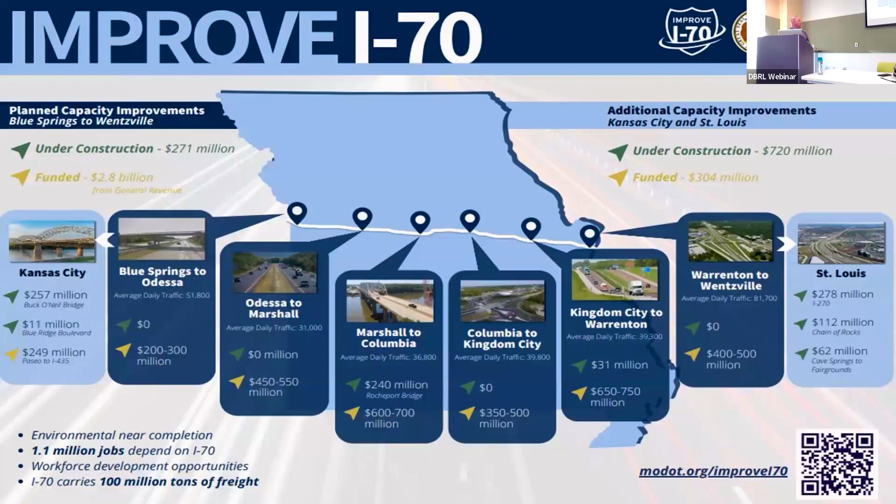The rest of it through Columbia will fall into the Marshall to Columbia project. But that's not going to be one project either - that's going to be split into a few different projects as well. This was our first shot at it, and that's kind of what we came up with. This is another way you can look at it. The first 3 projects are pretty much set. The first project, obviously, we're already working on that one.

The second project is Wentzville and Warrenton, and they have awarded that project, so they will start construction very soon. The third project is Blue Springs to Odessa, and they're well on their way into their procurement on that one.

I think now might be the right time for me to talk about this, since she mentioned design build a few times. Our normal process is called design bid build, where either MoDOT designs the project or we have a consulting firm design it, and then we put it out for bid, and whoever the low bidder is gets to go build it. It's worked for years and years. But on some of these larger corridor projects, and even some smaller ones, we use what's called a design build framework. It's a two-phase procurement.

The first thing we do is say, hey, we've got this project, we want to know who's interested. Contractors and consulting firms team up, and we put out an RFQ, a request for qualifications, and they submit SOQs, statements of qualifications. From those, and this is all dictated by state statute, we shortlist between 2 and 5 teams.

A team is usually 1 or 2 contractors and 1 or 2 design firms. We shortlist them, and then we work with them for a few months as they develop a proposal. So instead of us fully designing it and saying this is what you're going to build, they have a chance to use innovation and come up with better plans and different ways of doing things.

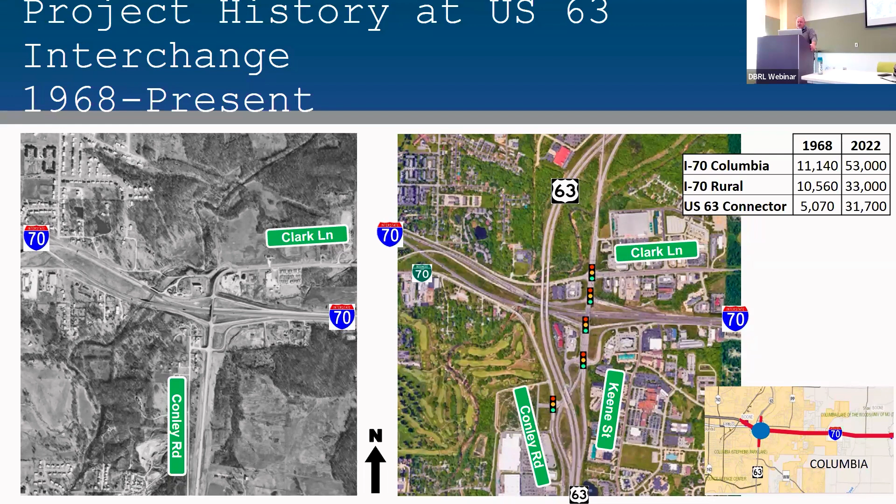So we're going to take another shot at fixing it, and I think we have a pretty good design. I told you when we go into the design build that we have things we have to have. We said you have to rebuild the interchange at 63. We also said a couple other things.

These two movements in the red lines that you see, the northbound to westbound and the eastbound to southbound—mainly the northbound one—those are the ones that really lock this interchange up and cause all the trouble. So we not only said you have to rebuild the 63 interchange, we said you have to give us direct connections for those two movements. By direct connect, it could be a flyover, it could be a loop ramp, but basically something where you don't have to go up to a ramp and stop. So that was a requirement, that they have to give us direct connects for those two movements.

There's some other movements that we would have liked direct connects for, but they get really expensive. The one everybody talks about is westbound to southbound. The problem is you end up buying a hotel, maybe part of Cracker Barrel's parking lot, and the bridge to do that has to be on what they call the third level, which is about 80 feet in the air. So it just gets really expensive, really quickly.

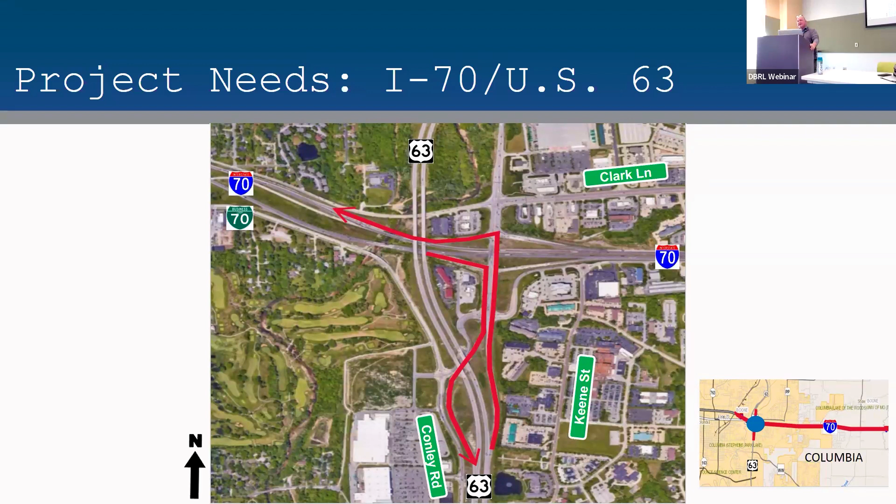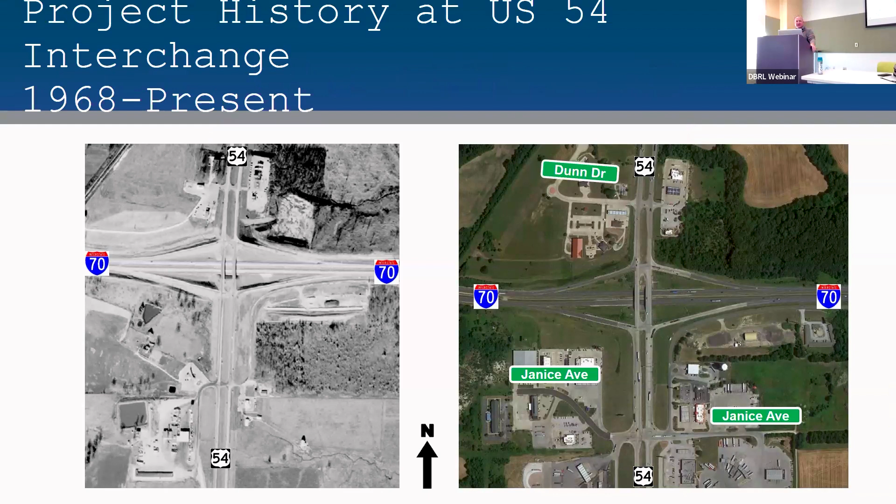This is the 54 interchange, and it's weird that the geometry of this interchange hasn't changed since 1968. It's still a diamond and looks exactly like it did, with the exception of all the businesses that have developed down there. These are the two movements that really cause it, and they're basically related to lake traffic—Friday afternoons trying to get to the lake, and Saturday, Sunday, Monday trying to come back.

We basically don't have enough money to build that kind of an interchange there. So we're going to do some stuff to help those traffic movements, but they won't be direct connects though.

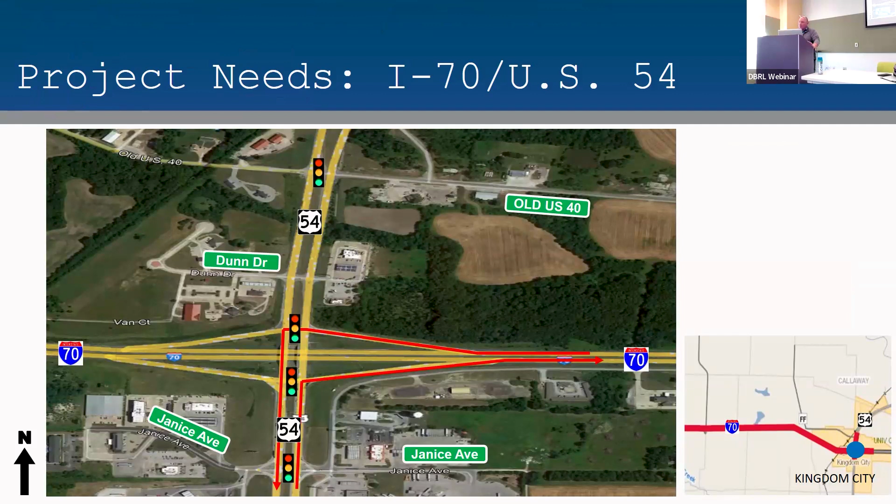So I told you a little bit earlier about the design build process, and this is the team that we chose—Millstone Weber—as the best value proposal. These are some of the reasons why they were chosen. Obviously, they give us the third lane in each direction. The biggest part of their proposal is they are reconstructing the pavement from one end to the other.

The existing lanes will be rubblized in place, and then we're paving 11.5 inches of concrete on top of that. The other proposal had some places where we were just going to do an overlay of the existing lanes, so you'd have a new lane, but then you'd still have the old lanes right there with a 2 or 4 inch overlay on it. So that's probably the biggest difference in the proposals.

We also include 16 new structures. When I get into this, you'll see where all these roundabouts go, but it has roundabouts. The 54 interchange is definitely a unique design as well.

They did commit to having 2 lanes on I-70 open during construction. That's during the day, we do have to close lanes at night. There's pretty much just no way around it. But they did commit to not closing lanes on I-70 during the day. They also had a commitment to growing a diverse workforce as well.

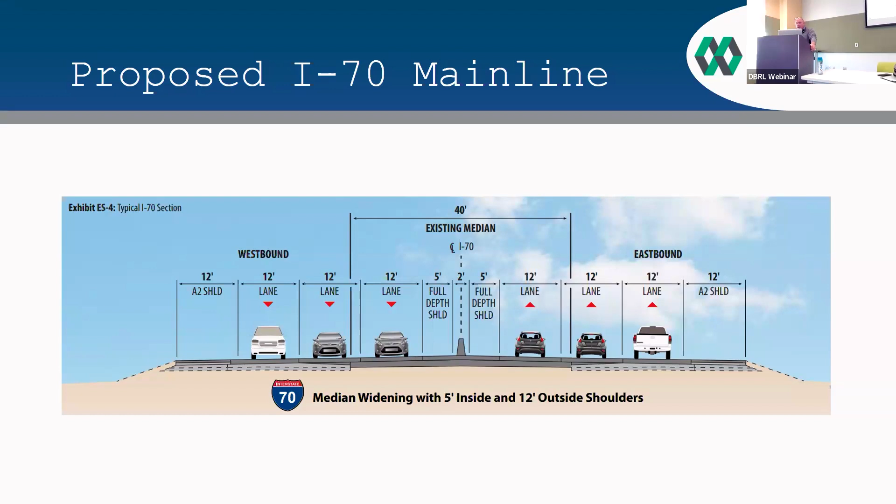So what's it going to look like? This is the rural section. As you can see, you can't really tell from the picture, but we have 3 12-foot lanes, a 12-foot outside shoulder, and a 5-foot inside shoulder separated by a type D barrier, which is taller than the barrier you see through here in Columbia. It's 42 inches tall, a lot harder for a vehicle to cross it than what we have out there right now. All 3 lanes are brand new, 11 inches of concrete, and that goes all the way from Columbia to Kingdom City.

How we're going to do that, if you've been through there you can see what we're doing right now. This is the first phase. We push traffic to the outside, narrow up the lanes, and basically pave the median. We're working on a 7-mile section right now, and we have the westbound side paved. We paved the inside lane and the inside shoulder. We've spun our paver around, and we're going to go back whatever weather allows this winter, paving the inside lane eastbound and the shoulder for that section.

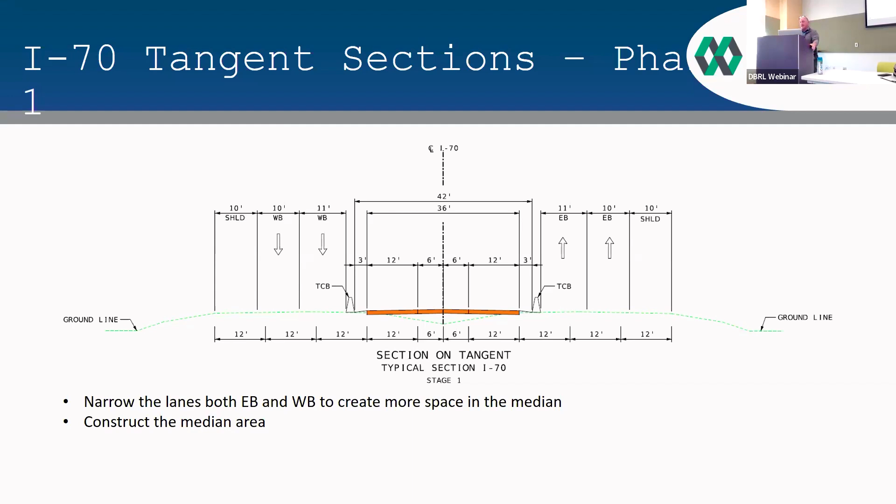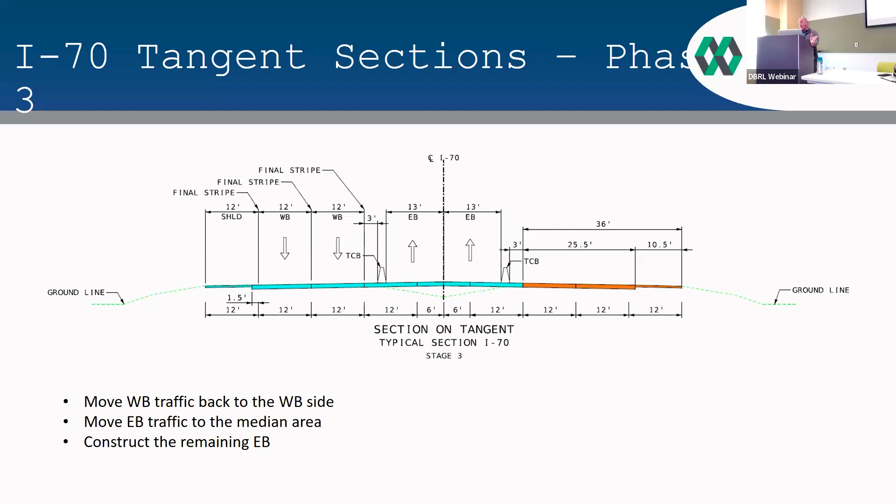Once we get the median paved, we're going to put the westbound traffic on what we just paved so we can finish out the westbound side. Then we move all the traffic over westbound, kind of where it's going to be eventually, and put eastbound in the median and finish out the eastbound side.

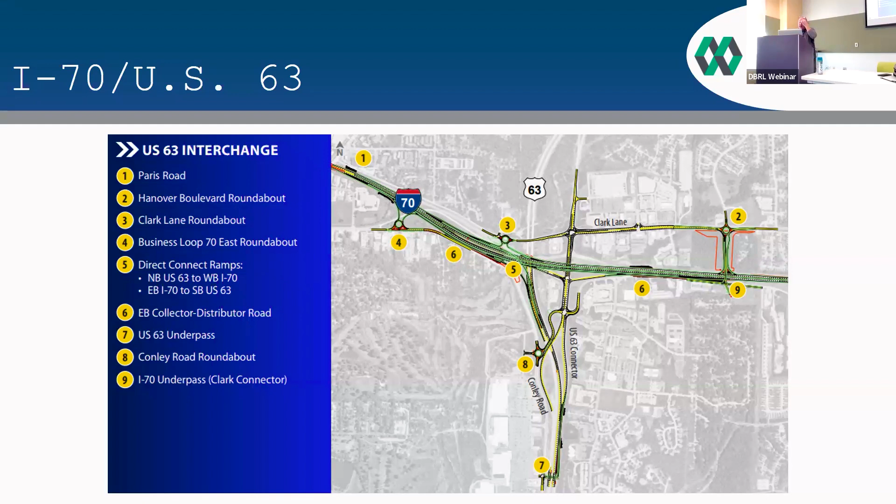Now we're going to talk about the 63 interchange. Like I said, we told them you need to redo it, you need to make it better. The way to do that is to take traffic off of the connector bridge itself, so that's what the 2 direct connects do. This team took it a little farther and tried to figure out ways they could take even more traffic out of the connector. I don't have anything to do with that, so this graphic, don't get too hung up on it. I'm going to go through each of the pieces as we go through here. But as you'll see, it's a lot different than what we have out there now.

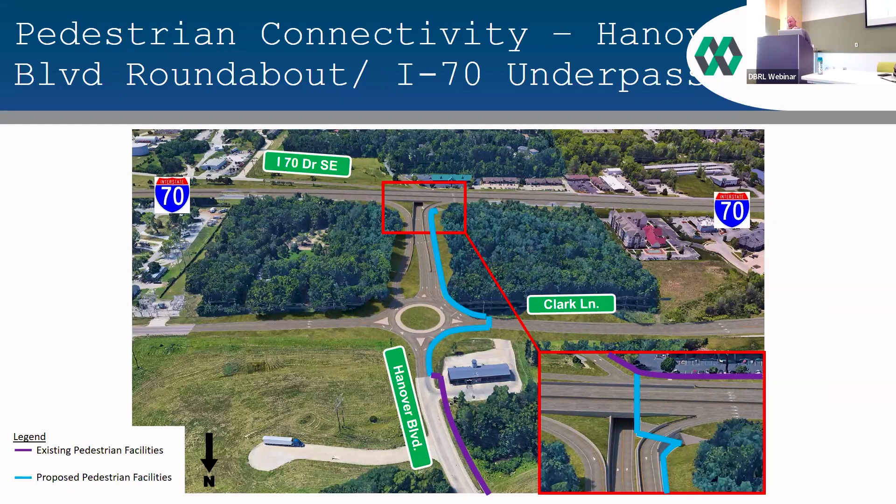For eastbound 70 traffic trying to go north, this is your connection that you'll take. You'll come off, hit this roundabout, go down Clark Lane, and eventually be able to hit 63 North. There's nothing that keeps you from using this to go southbound, but the other roundabout and connection east of the connector is better. It is a little bit adverse travel.

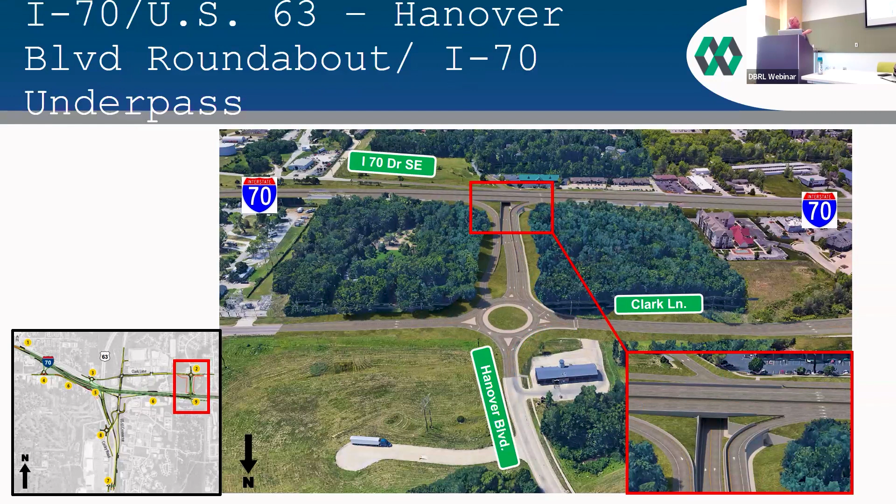The westbound 70 traffic can come in here and it's all free rights, taking you right back to the connector where you can go south. Same thing here, there's nothing to keep you from using this one to go north, but it's probably better to take the other one. So what that allows us to do, I don't know if it shows it very good, it allows us to get rid of these two ramps, the westbound off and on ramps, and replace them with this and this. We can come back to that if you got questions later on.

So that's that one, that's this one. This picture is probably the best one that shows our flyover from northbound 63 to westbound 70.

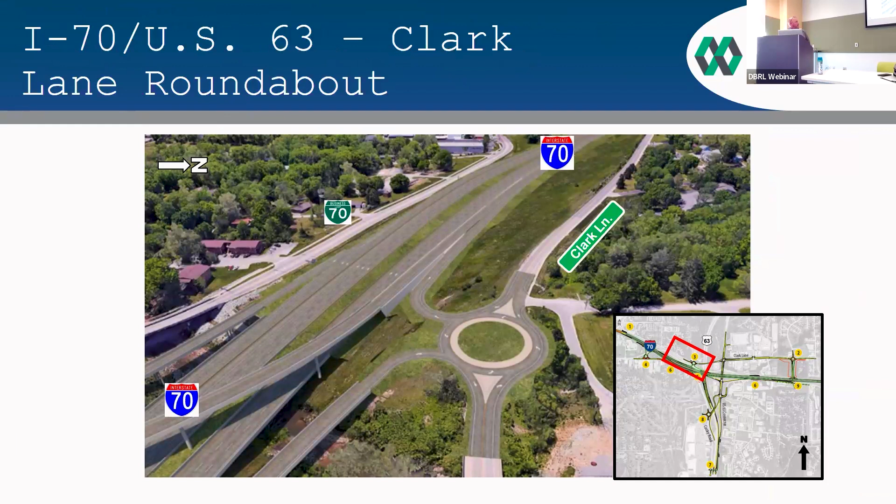You can see it coming in there in this photo as well. There's a little bit going on in this one. The two red lines that I showed you earlier, the two movements that we require direct connections for, that's what you can see here with the red lines. The northbound 63 to westbound 70, nonstop, right through.

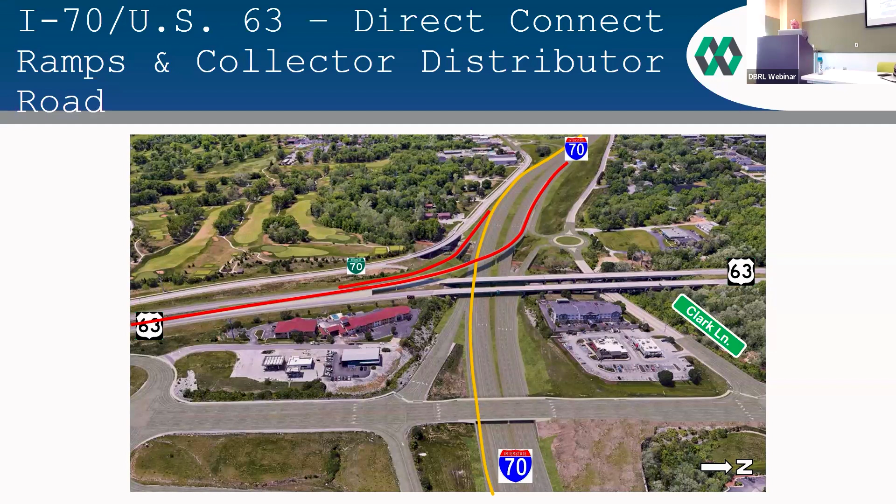Same thing from eastbound 70 to southbound 63, nonstop ramp going through there. The yellow line is a little bit different. That's what we call a collector distributor road. I'll show a picture of it here in a little bit, but basically you're going to have your 3 through lanes if you're going eastbound. You'll also have 1 or 2 extra lanes out here separated by a barrier wall. And that allows all that traffic that wants to exit to get over there and come back on. It continues all the way through the connector to the east. So it allows a lot of that merging traffic and departing traffic to happen on this slower speed roadway rather than having to try to get into I-70 traffic. You'll get on this road and then it'll all get back on there.

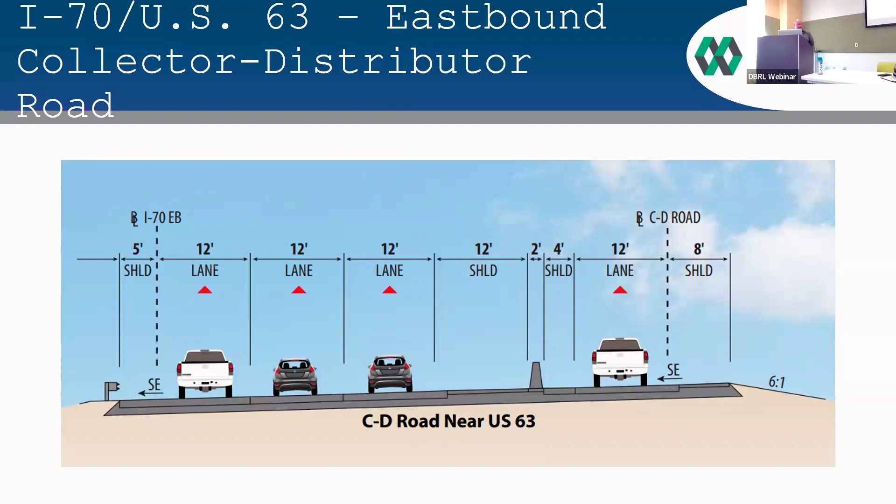This is what it looks like. It's shown as just 1 lane out here, but in quite a bit of it, there's 2 lanes over here. Like I say, you still have your 3 through lanes, but you'll exit over here and then you can get off at the connector. You can hit the southbound 63 connection, and you'll also be able to hit another roundabout that I haven't shown you yet that is way up there.

But for now, this slide is showing you the sidewalks. We are building sidewalks across the connector bridge as well, connecting the north to the south. We are still working on this. The city of Columbia wants more sidewalks than what we have planned. So we are working with them to try to come up with a plan to do more.

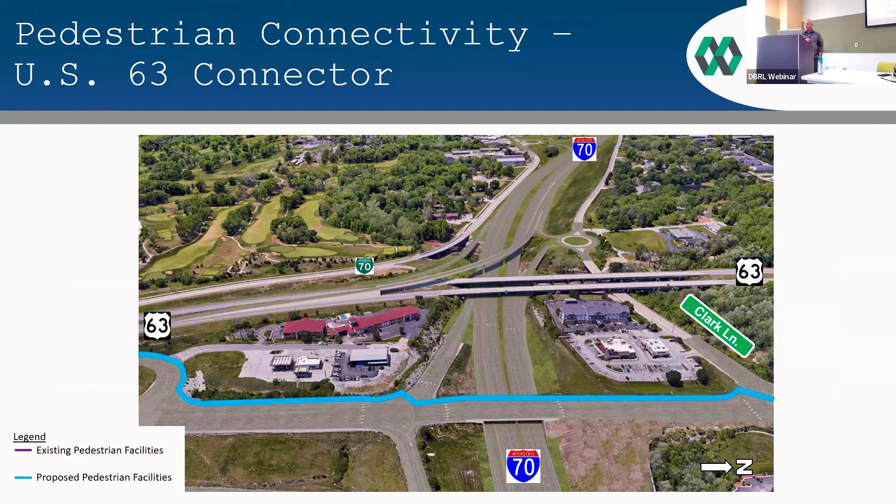The next roundabout, this one is the business loop roundabout. As you are aware, the westbound ramp to the business loop, we closed that. That was going to get closed no matter what design we used for the 63 interchange. It was mandated that it be closed. If you want to dive into the details, it's a left-hand exit, which is not totally bad because we're building one on this job, but it was a left-hand exit with no deceleration lane, and you're going up a hill around a curve. So there's been a lot of crashes at that location. So it was deemed that we needed to get rid of that. That's actually been in the works for about 5 years that was going to go away. So you can see that it's gone.

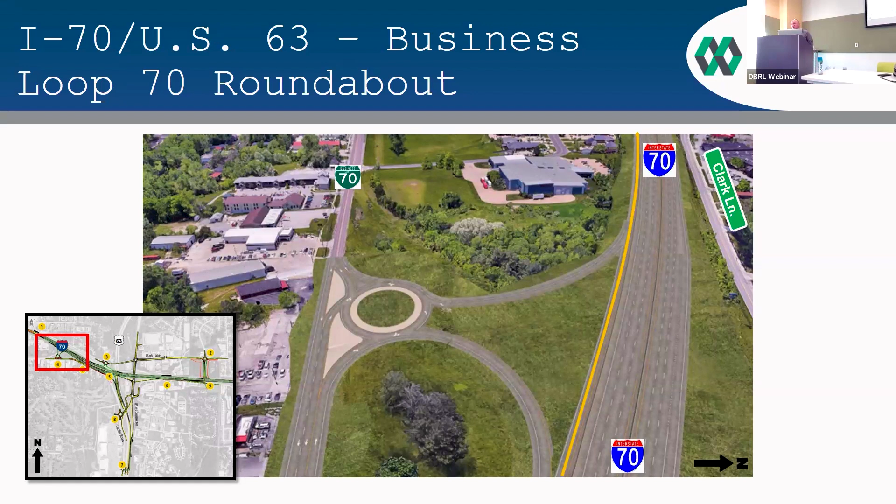This is another roundabout we're building. This is Aldi right here. You can't see it obviously, but this is an Aldi. Right now, this is just a standard intersection. We are going to replace that with a roundabout as well. It's just going to make it function a lot better.

This route goes up and you end up over here at this triple left-hand turn. We're redoing this as well. Basically, we're getting rid of that triple left-hand, and we're not going to allow you to turn left at all right there. And we're not even going to let you go across right there. What this does for us, it allows you all that signal timing that you need for that triple left-hand turn and the through movement. We can distribute that to other places, and we have a fix for that.

Instead of coming down here to go triple left-hand turn or go across, we are building this, which is what you've probably seen we're building right now, which is an underpass of 70 that feeds you directly into the connector. So if you were taking that triple left-hand turn, you can come here and go straight into the connector.

If you were taking that instead of the triple left, trying to go across, you can do that same thing here. So that's what we're building right now. This is more just trying to take more traffic out of that connector area. This is one of a whole bunch of slides that shows how we're going to build it.

I wouldn't even try to look at it. The one thing I want to tell you is everything you see in blue is going to be complete and open, including the 63 underpass, which you can't see down here. All of that is going to be open before we ever close the bridge. We have to close the bridge to rebuild it.

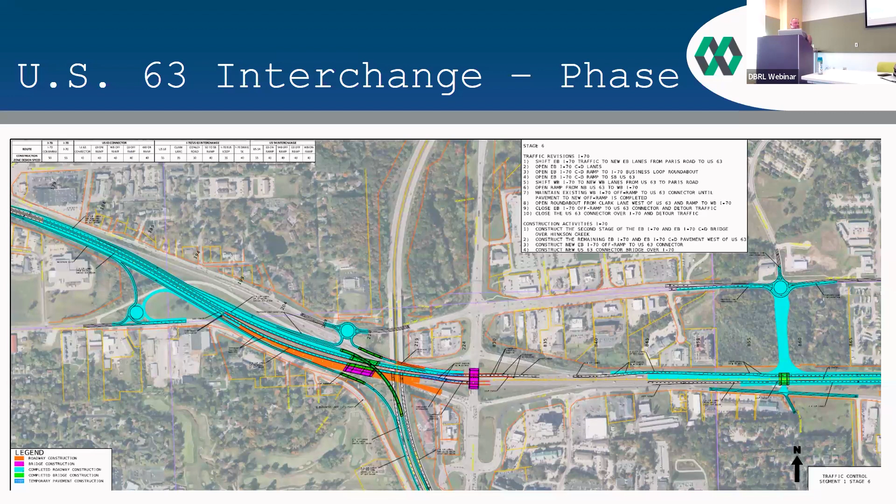This is the Route 54 interchange, and we don't really have a name for it. I can't say it's the first one of its kind because there are very similar interchanges. If you're familiar with the 763, what they call the dog bone down below, this functions kind of the same way, except the dog bone is not a dog bone, it's an oval, and it sits up top. It gets rid of all of these signals that were here and here. Another good thing about it, it provides free right-hand turns on all 4 legs.

Another thing is the 2 existing bridges are in the middle right here, so a lot of this work can be built offline. We're going to build everything in orange before we ever really affect traffic on 54. So the new bridges are built outside of the old bridges, and a lot of this work can take place. I wouldn't say we're just going to build it all and then open it up, because it's not going to be that simple, but we're going to be able to do a lot of work here before we ever mess with 54 traffic.

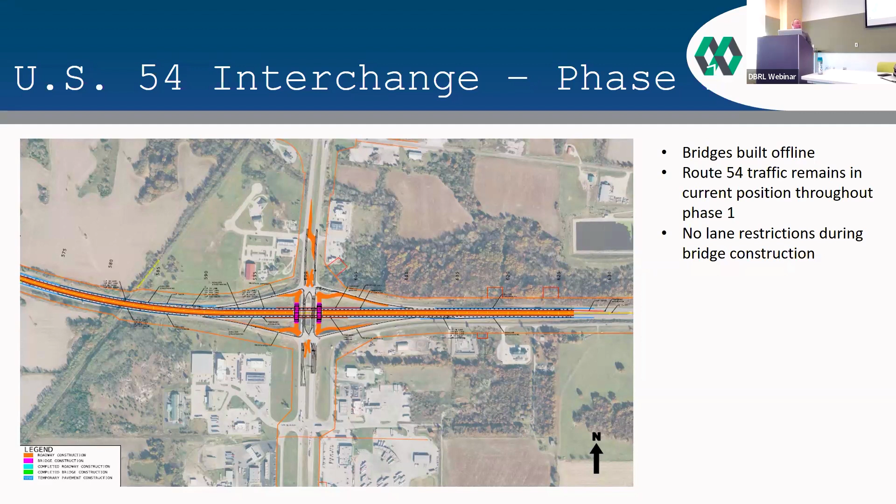I'm going to go back and show that one more time. I know there's something I'm forgetting to say here. But like I say, getting rid of these 2 signals allows us to do a lot better job of managing the traffic.

What we had planned here, what we called our preferred alternative, was a diverging diamond, which is what you have at Stadium. We looked at the traffic 7 ways from Sunday, and 95% of the time this works better, and the other 5% of the time they're tied. So the diverging diamond, it's not a bad design, but for this location and the traffic that we have, if you can imagine going through here anytime other than Friday afternoon or Sunday coming back from the lake, it just works so much better because those 2 stoplights just don't exist.

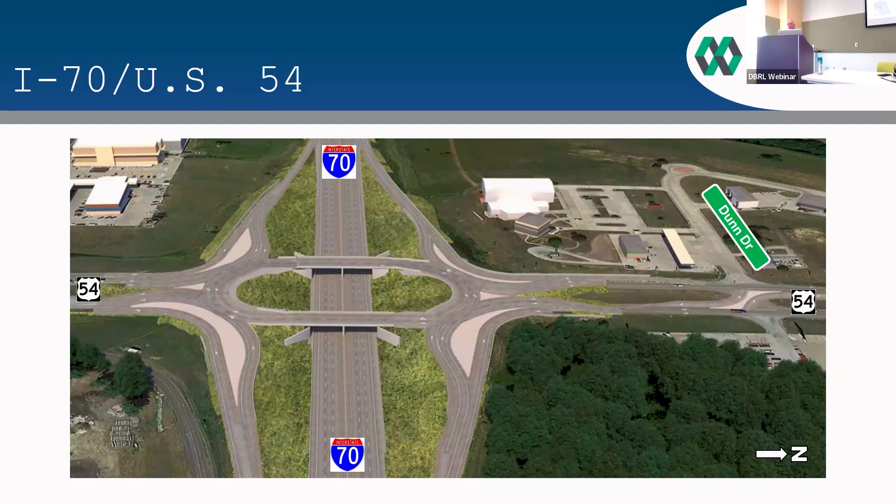You slow down and you weave through it and you're on your way. I got a little flyover video that will kind of show all of it. I'll try to talk through it as we go. It's about 3 minutes, I think, but it shows all the different pieces, and the traffic you see is actually from our real-time traffic models showing how traffic will flow.

Cars look a little funny since it's a model. But we're starting off at 54. That's what it looks like now, and that's what it looks like in the future.

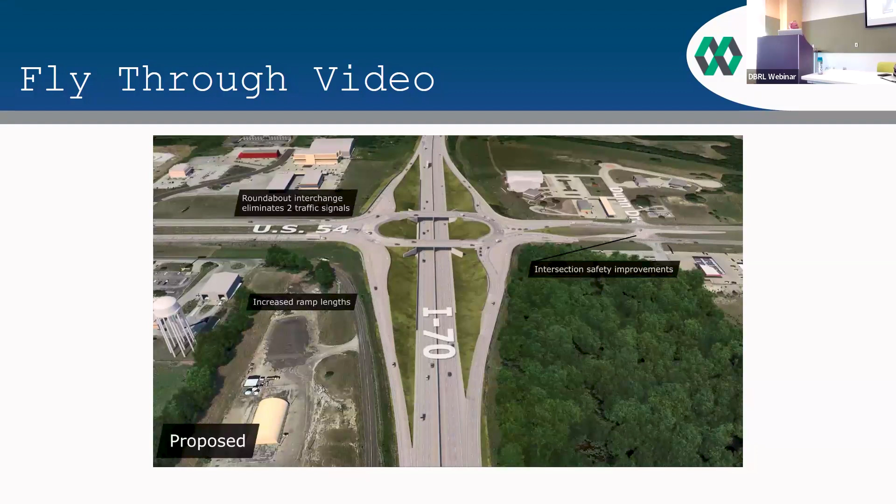I will mention that we are getting rid of the railroad overpass up here so we can lengthen these ramps out and the acceleration lane and deceleration lane to help that. They're really short now, but we're able to tear that railroad bridge down. On this leg right here, we're building that longer and wider to allow more storage for that Friday lake traffic.

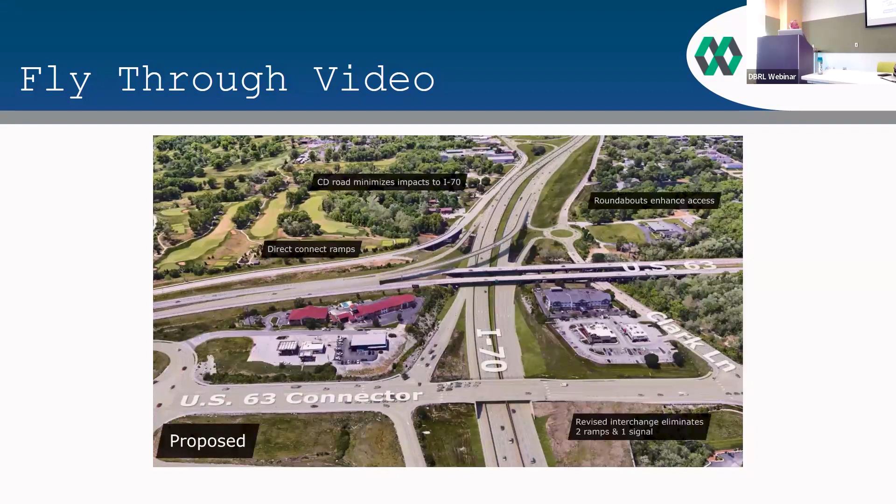Now the big one. This is what the connector looks like now, and there's too much for me to talk through, but you can see our flyover direct connect there, as well as the other one that comes to the southbound. You see the ramps are gone. It's kind of all you can see. You can see the roundabout up here and the one way up there.

That's what the intersection by Aldi looks like at the moment. Like I say, this isn't really a necessity, it just improves it. That's the 63 underpass, or where it's going to be.

As you can see, it's a one-lane, one-way underpass coming under and just feeding you right into the connector. We're also building it wide enough where we can put a sidewalk through there. There's nothing to tie it to on either side right now, but we feel like somebody will someday, and we didn't want to build it so narrow that couldn't happen.

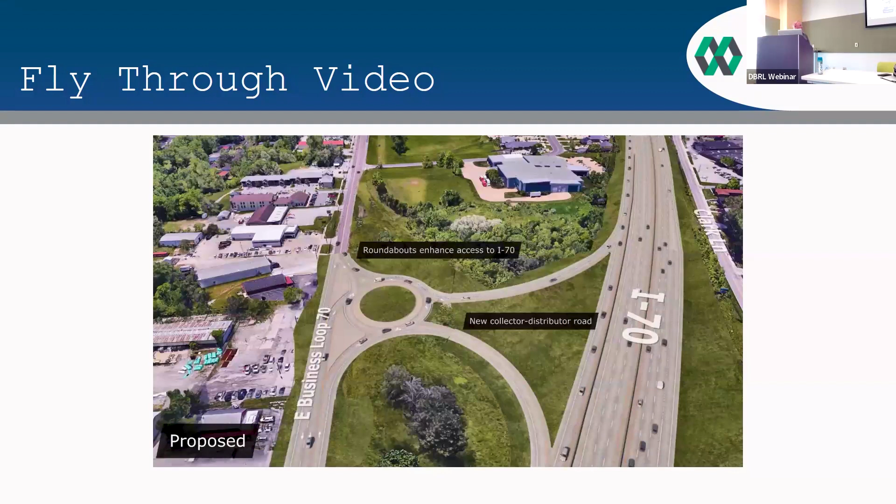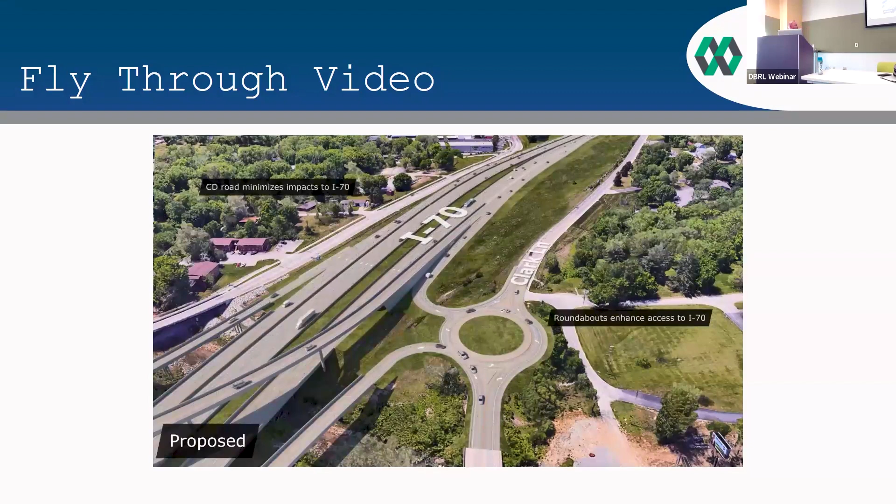I know it's a lot to take in, so I'm sure you have questions.

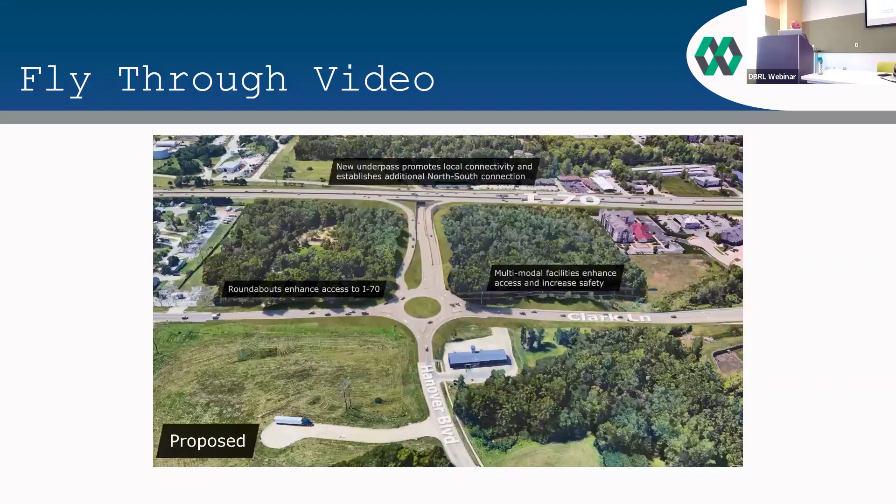Oh, this is the Hanover roundabout. As you can see, we're going right through the middle of it. Lane to get off of 70 to come up to Clark, lane to come from Clark to get on 70, and a two-way road underneath to come either way, from Clark to the southeast outer road or southeast outer road up to Clark. You can see that we're building a little - they tell me I can't call it a tunnel - building a little underpass for pedestrian traffic as well.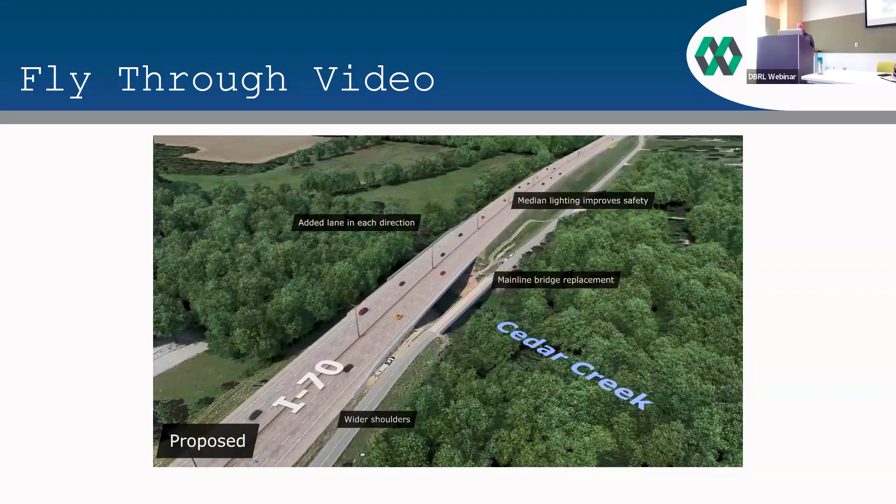We are putting lights in one location, and to make the proposal look better, that's the picture that they brought in. We're only putting them, I think, in one location in the rural part, and that's where we have a sag vertical curve that some lighting would probably help us out. So that's that, I think I've been over that enough.

The next ones we're doing are Warrenton to Wentzville. It does include a part of 64 as well. One thing I didn't mention earlier, the $2.8 billion that the governor gave us to add the third lane - we already had this project planned for the connector here at 63.

So we took that money and brought it into the program. It didn't make sense for us to add a third lane and then have somebody else at a different time under a different project come in and do that job. We also had money already planned for 54, so we brought that into the program.

That's kind of what's happening here on this Warrenton to Wentzville job. They already had plans for the curve realignment, the railroad overpass, adding a third lane to 64. It's just all so close that they just decided to put it all together and bring that into the I-70 program, even though it's not part of the 2.8 billion.

I thought I had a slide that did that. For our project, it's 405 million... 293 million - well, the total budget is actually 420. 293 million of that came out of the 2.8 billion. The other 127 - is my math right? - that other 127 million is for those projects that were already planned for the connector and 54.

Yeah, this is not accurate anymore. They're under contract now, like I said. The winning team for that is Emery Sapp with Clarkson Construction. Seems odd, the St. Louis contractors coming here to work and then a Mid-Missouri contractor going there to work, but that's the way it played out. Blue Springs went to Odessa - they're just kind of getting started.

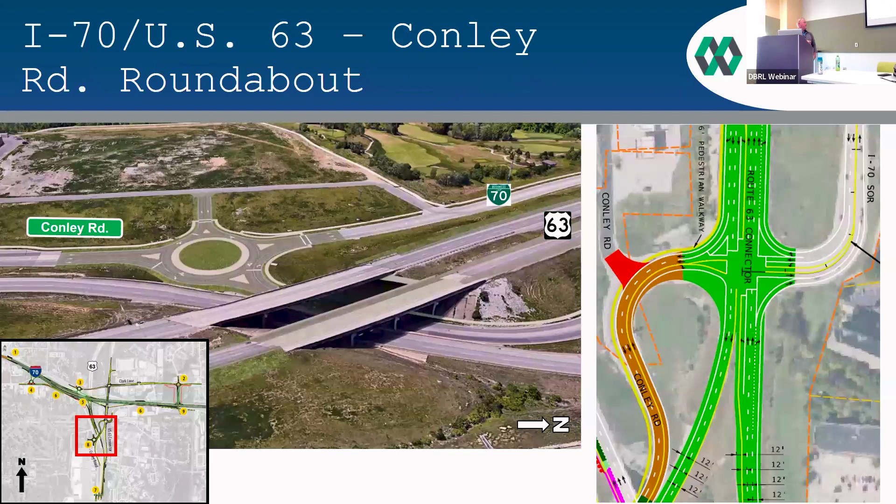I've got a question about where you're building the bridge there. On the video it showed people turning left going south, and turning right going north. Is there an underpass there on 63? I'm concerned because that's right where IHOP is, and I like to go there. I didn't see what you were actually showing. Is there southbound traffic coming down Conley Road? Is there going to be a turn signal there?

I think our plan right now, I don't believe there's a signal there currently, just stop signs. And I think that's what it'll be in the future, just stop signs. If it becomes an issue where we need a signal there, we can always do that, but with the amount of traffic there we believe it'll work with just stop signs. People on Conley will be able to come in from this way or this way. It is a one-way underpass, and it just feeds you directly into the connector.

Why does this take so long is the question. Like I say, we are hoping to get it all done quicker than what we say, but we have to plan for weather. This bridge construction is happening during the winter time. In theory we could do one bridge one summer and one bridge the next, but I assure you we are working as hard as we can to try to get it done as soon as we can. I hope it does not take 300 days.

We're actually building the walls out there right now for the first bridge. I think you'll see some really good progress on that in the very near future. We have material ordered for the whole bridge, so hopefully it won't take the 300 days.